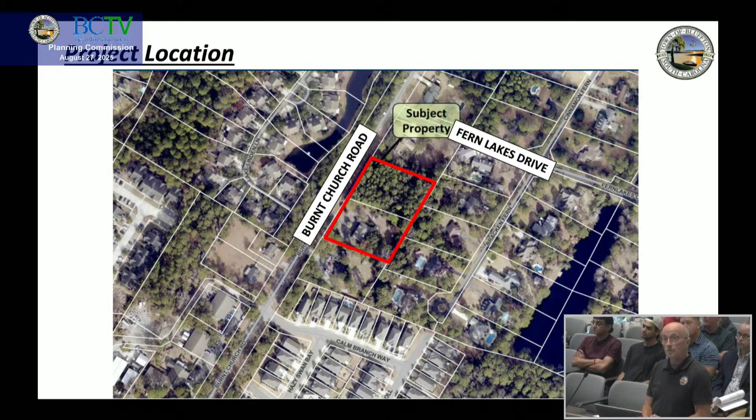Here's where the subject property is located. Here's an aerial of the property. We've got a red line wrapping around 2 parcels. Actually, it is the northernmost parcel and just a little bit of the northern portion of the southern parcel would be included in this property. I'll point that out when we get to the site plan.

As the chairman already mentioned, this is old business. On June 25th, 2025, the Planning Commission tabled this application. PC members asked that the applicant provide a traffic assessment, address public comment concerns that were expressed at the meeting by the adjacent property owners, and, at the discretion of the applicant, meet with 3 commission members to further refine the proposed development.

On July 15th of 2025, the applicant did meet with the 3 Planning Commission members and provided a resubmittal on July 30th. The resubmittal addresses neighborhood concerns and includes a traffic assessment.

The application for a preliminary development plan is located within the neighborhood core and is subject to the standards set forth in the UDO. The subject property is currently vacant and adjacent to Beaufort County jurisdiction. The applicant proposes a 4,464 square foot commercial building with associated driveways, access, parking, utilities, and stormwater infrastructure. The property is also within the Highway Corridor Overlay District and will require a certificate of appropriateness, Highway Corridor Overlay, that reviews landscaping, lighting, and architecture.

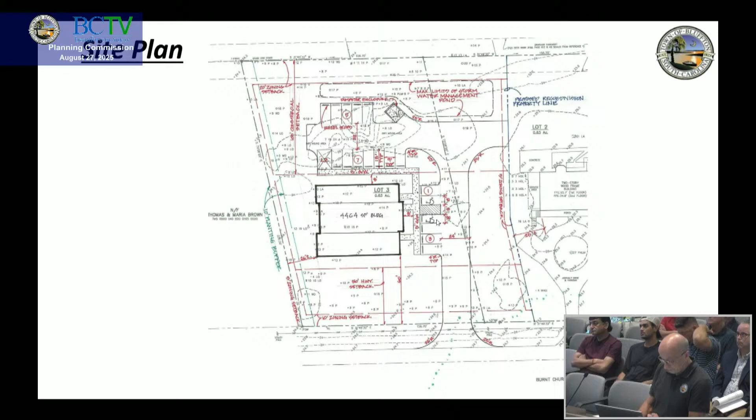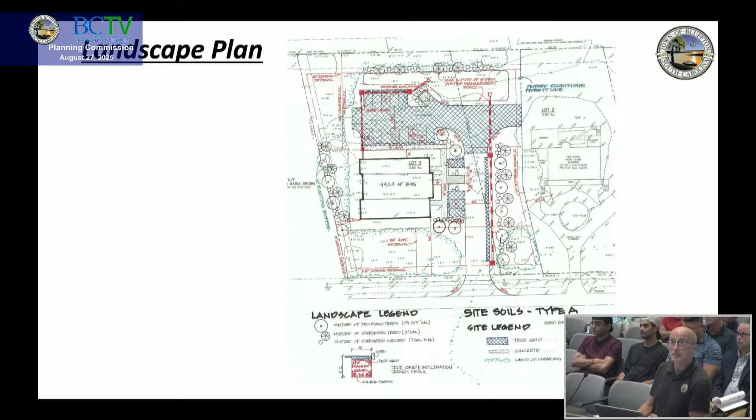The responsive criteria was included in your packet. Planning Commission has the authority to take the following action.

You can approve the application as submitted. You can approve the application with conditions. You can table the application, or you can deny the application as submitted by the applicant.

Town staff finds that the requirements of section 310.3A of the UDO are met and recommends that the Planning Commission approve the development plan application as submitted. The suggested motion is below. The applicant is here, and I can take any questions, or the applicant can answer any questions you may have.

Mr. Chairman, seeing as this is old business, I'd like to go ahead and start with the commissioners to see if there are any questions or comments on this, and then we can bring the applicant up if needed.

The only comment that I have concern about is the 19 and 12-inch live oak on the northern side of the building, and I ask that as the development plans progress, they really take note of those and try to do everything they can to preserve those, as well as the cluster of live oaks in the northwest corner in the front of the building.

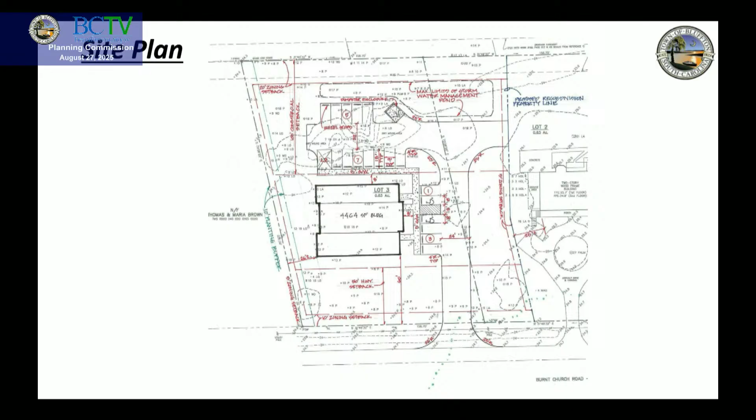There's a 30-foot drainage easement in the back. Is there already a ditch there that you're going to outfall to? No, but the topography lends itself to take it down the property line and then down the back of the existing subdivision.

Those details will be worked out with your stormwater management plan. I'm just curious. Thank you.

If there are no other comments, I'll entertain a motion. Dan, could you put the motion back up for us? I'll make a motion to approve the 121 Burnt Church Road preliminary development plan application as submitted. We have a motion and a second. Any discussion? All those in favor? Aye. Passes unanimously. Thank you.

Under new business, first item, the Goddard School Development Plan. A request by Kathleen Duncan of J.K. Tiller Associates on behalf of David Johnson of Speyside Partners LLC for approval of a preliminary development plan application. The project consists of the construction of a two-story daycare building with associated infrastructure. The property is zoned Buckwalter PUD and consists of approximately 1.6 acres identified by the tax map number in our agenda, within the Washington Square Master Plan.

Mr. Frazier: This is a preliminary development plan for the Goddard School, a request by Kathleen Duncan of J.K. Tiller Associates on behalf of the property owner, David Johnson of Speyside Partners LLC. The project consists of a two-story daycare building with associated infrastructure. The 1.6 acre property is zoned Buckwalter PUD, within the Buckwalter Commons Parcel C4 Master Plan. The property is subject to standards set forth in the Buckwalter PUD Concept Plan and Development Agreement, the Buckwalter Commons Parcel C4 Initial Master Plan, and UDO Sections 5.3 and 510.

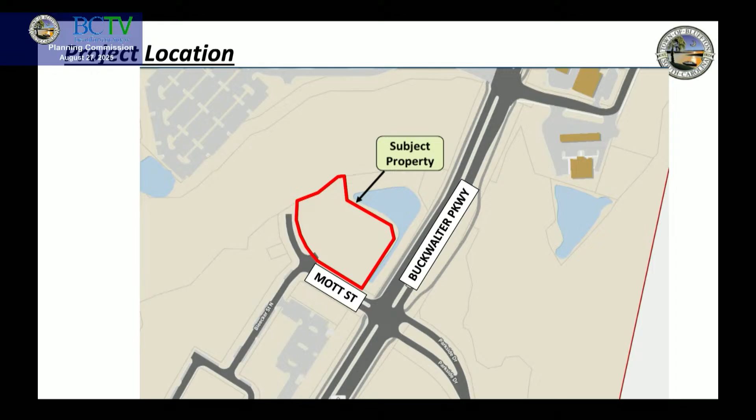As part of this plan, the developer constructed roads and infrastructure to support future development of individual parcels. The proposed development includes a 16,080 square foot, two-story daycare center, including 13 classrooms and one multi-purpose room, with associated driveways, access, parking, utilities, and stormwater infrastructure. The proposed facility is designed to accommodate approximately 220 students and 26 staff members.

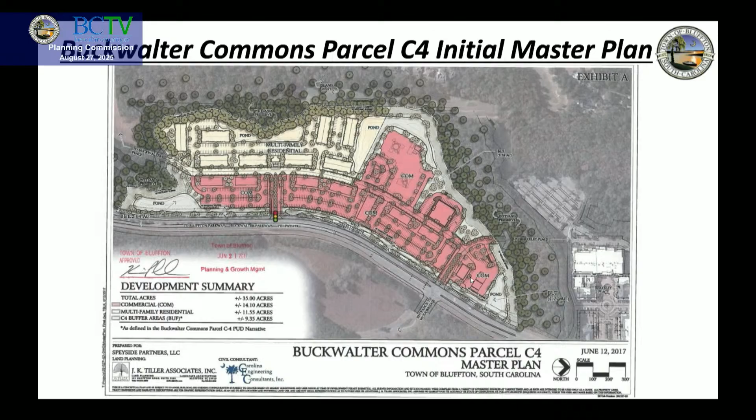Here is the C4 initial master plan I just referenced. This is the location we're talking about. In the master plan, it's called out as commercial development. The proposed development requires 28 on-site parking spaces.

The applicant proposes 45 parking spaces to accommodate staff and school drop-off and pickup during peak periods. The Goddard School follows an operational model implemented at other locations where parents are required to park their vehicles and walk their children into the facility, so there is no drop-off at the curb.

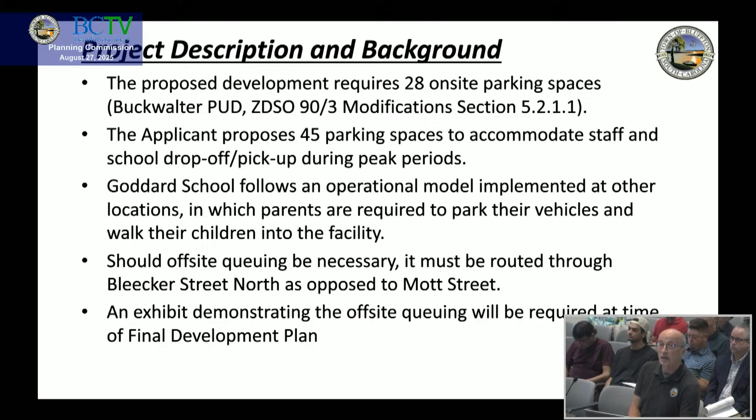Should off-site queuing be necessary, it must be routed through Bleecker Street North as opposed to Mott Street. An exhibit demonstrating the off-site queuing will be required at time of final development plan. Washington Square Review Board approval letter will be required prior to development plan approval. A traffic assessment submitted by the applicant concludes that the proposed daycare will generate comparable daily and peak hour trip volumes to the commercial use previously anticipated in the original traffic impact study for Washington Square. This parcel was contemplated as a gas station, which would have generated more trips than what's being proposed.

Staff comments on the preliminary development plan were reviewed at the July 9, 2025 DRC meeting. The applicant provided a response to comments and revised site plans on July 25.

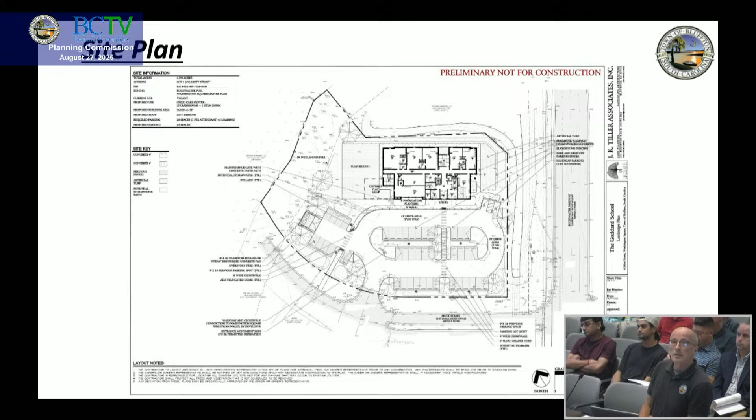Here's the site plan, and a closer view of it. The routing just opposite the entry onto the site is Bleecker Street North, accommodating two-way traffic going in, circling around, and coming out. The playground is on the west side of the building, and the east side has artificial turf. The entrance is up front, with walkways allowing parking and a minimal walk before reaching a crosswalk that guides you to the front door, with a sidewalk wrapping around the building.

They are not providing the 8-foot foundation plantings adjacent to the building because it's understood the playground and being able to look out the windows and see the playground and see the kids is an important part of this.

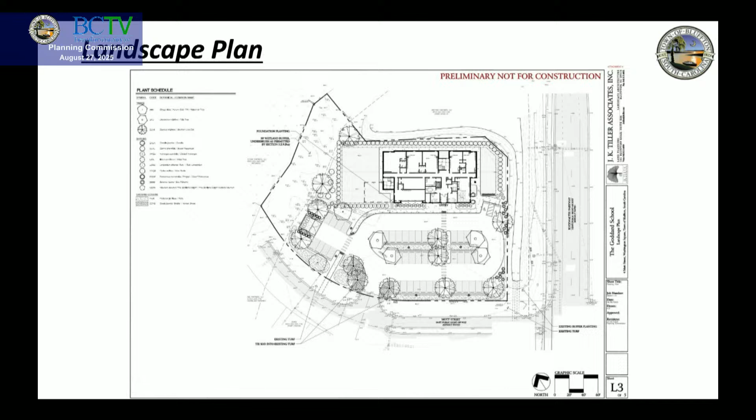The dumpster is at the end of the dead-end parking area. I can return to this if you have any questions. The landscape plan, I also have a close-up of it.

Here they're providing, in lieu of the 8-foot around the building, planting that wraps around the building, plus the enclosed areas for children's playground. I will return real quick to... I don't have... I guess I can use this one.

This is Bleecker Street North that we're referring to when we're talking about queuing. What we do not want is queuing onto Mott Street, which, if enough cars are there, would back up into Buckwalter Parkway. We could resolve this by making sure any off-site queuing while dropping kids off at peak hours is routed along Bleecker Street here rather than Mott Street.

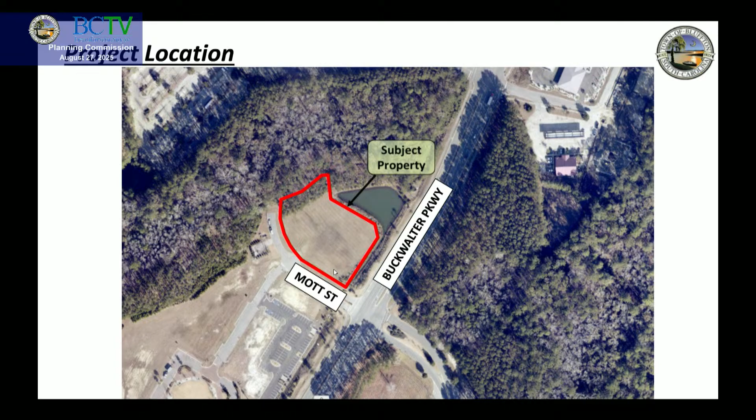Planning Commission shall consider the criteria set forth in section 310-3A of the UDO in assessing an application. These are the criteria; the responsive criteria were included in your packet. Planning Commission has the authority to approve as submitted, approve with conditions, table the application, or deny the application as submitted by the applicant. Town staff finds that the requirements of section 310-3A of the UDO are met and recommends that the planning commission approve the development plan as submitted.

Of the suggested motion there, I'll open it up for questions, and the applicant is here. Why don't we have the applicant speak if they'd like?

Feel different being on this? It does feel different. Good evening, commissioners. Thank you for having me. Thank you for being here and giving your time and attention to things that matter to Bluffton.

Again, I'm Kathleen Duncan. I'm a landscape architect and the project manager at J.K. Tiller, and here representing the Goddard School, and I'm happy to answer any questions you might have.

Okay, let's start at Commissioner Delacour, your end. Yeah, I'd like to know a little bit more about this: there's 220 students, 45 parking spaces, 26 for staff, so there's 19 for drop-off. I want to understand two things: how are the times staggered so that 19 parking spaces is enough, and how will we enforce people not queuing up on Buckwalter?

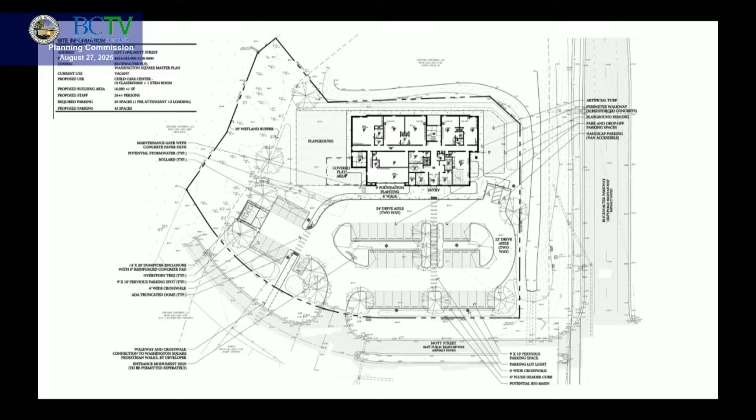I do have a question, Mr. Frazier. That north-south connector road, Mott Street, is supposed to at some time, by some magical way, connect to where the Cinemark is and the plaza. Do we have any indication if it's being funded, if anybody's funding it, or is it still just a ghost, at some point in time it's gonna connect? No, Mott Street going north. I don't think there's anything, I don't think there was discussion on that right now, but I wanted to ask just to see. Unfortunately, that takes two parties because it's not just the developer on this side, it's the property owner on the other side who has to meet that road and make that happen. Yeah, and that's a real good point, and that's why on the commission nowadays we require that they pave right to the property line, to avoid this very situation.

Do you want to take it back to the proposed motion page, sir? Thank you.

Entertain a motion? I'll move to approve the Goddard School Preliminary Development Plan application with the condition that the school coordinates with the Bluffton PD on the alternate queuing plans based on the need in their program. Do we have a second? Second. Any discussion? Want fire in there? I think the police can pull the fire in as part of it, so I think that's fine. All in favor? Aye. Aye. Aye. Okay, passes unanimously. Thank you.

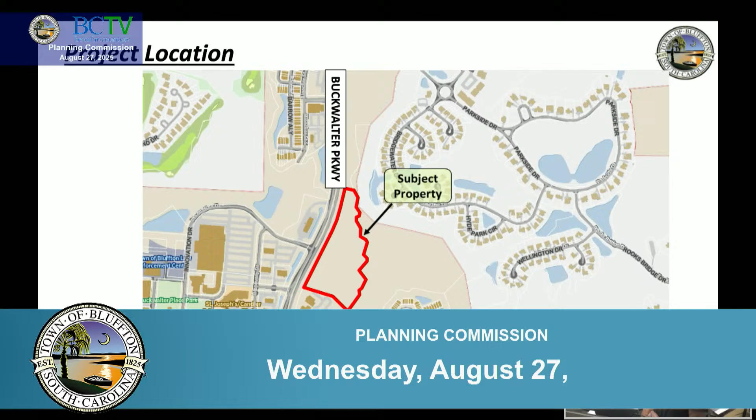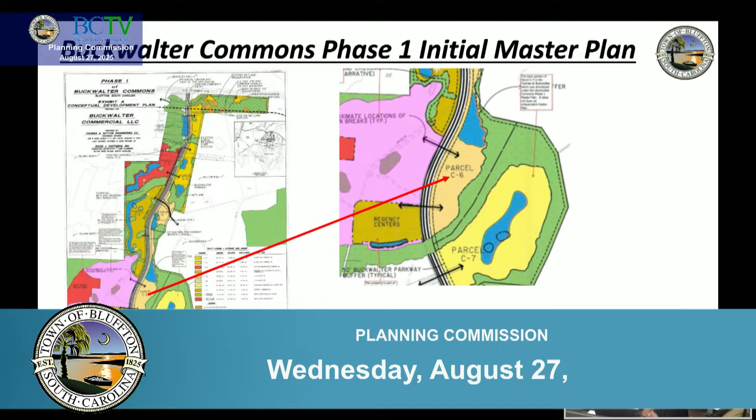Here's the location of the property. It is off Buckwalter Parkway, opposite of the Buckwalter Place development. The aerial is the same location. It is actually within parcel C6 of the Buckwalter Commons Master Plan.

On August 12th, 2025, Town Council approved a transfer of development rights of 60 residential units from the town's development rights bank. A 100% density bonus for affordable workforce housing was also approved, allowing for an additional 60 dwelling units for the property. The units will be available to Beaufort County Memorial Hospital employees, but also to any other person seeking affordable housing. The development includes 30 units restricted to 40% area median income, 60 units restricted to 60% AMI, and 30 units restricted to 80% AMI.

The proposed development includes 5 multifamily buildings totaling 120 units, 1 leasing office building, amenities, and associated infrastructure. It'll also include a building pad for a future 6,000 square foot medical office building.

The site is primarily accessed from Buckwalter Parkway. However, a second access will be utilizing a shared access easement with Lord of Life Church to the south. This will circle around and exit out onto Buckwalter Parkway at the signalized intersection opposite Buckwalter Place Boulevard.

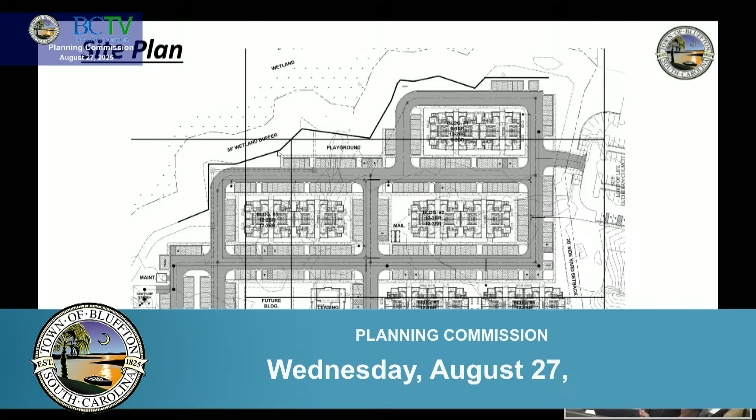We see opportunities for some additional parking in multiple locations. The property line is actually the wetland determination line, and they have to come 50 feet off of that with a wetland buffer. That 50 foot takes them to this line here. The heavier line is actually a retaining wall that is part of the design of the site plan.

Planning Commission shall consider the criteria set forth in section 310.3A of the UDO in assessing an application for a preliminary development plan. These are the criteria. Responses were included in the packet.

Planning Commission can take the following action: you can approve it as submitted, you can approve the application with conditions, you can table the application, or you can deny the application as submitted by the applicant. Should the Planning Commission choose to approve the application with conditions, town staff finds that the following conditions should be met prior to final development plan approval to be in conformance with UDO section 310.3A: the applicant will coordinate with town staff to meet the parking requirements that are per Buckwalter PUD ZDSO 90/3 modifications, section 5211. I have a suggested motion.

I'll open it up for questions. The applicant is here. Mr. Chairman.

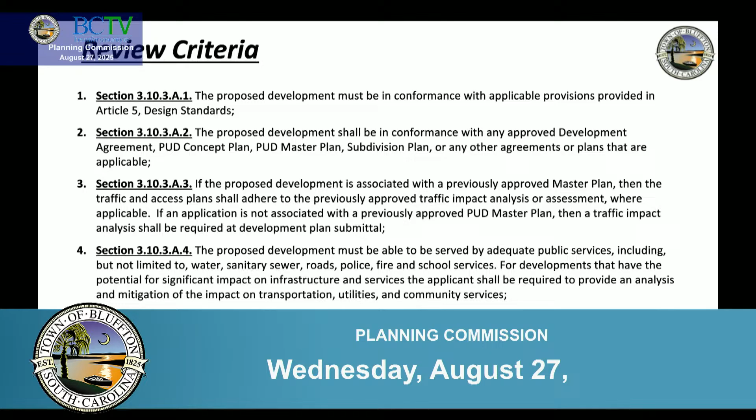If the applicant would like to speak to the project. My name's Tim Butcher with Carolina Engineering, representing the Livewell Terrace project. Dan did a great job presenting the project, and pretty much just here to answer any questions you guys have. Got the ownership and developer and their counsel here, so I'm just here for anything that you guys need.

Well, let me ask you, based on the public comment we had earlier, as far as wetlands on the property, Army Corps of Engineer delineation, any comments on that? Any data to back that up? Back, I want to say 2003, when the PUD was done, there was a delineation then, and we just had another, and that was verified as well by the Corps. In 2022, we had another delineation that was verified by the Corps as well, so now we have a current delineation for the site. And I know I've walked that property, it's been about 6 months, but it was, for what it's worth, dry back then. We've had some extreme rain in the last month here. I'm thinking that's probably played into it somewhat.

We can't, Richardson, help me out here. Can we overrule the Army Corps of Engineer and say there are wetlands where they say there aren't? Under our wetland ordinance, so this was a 2022 one, it's good for 5 years. The wetland ordinance the town just adopted creates kind of a distinction point from September 2023 and prior. That was prior to the decision that the EPA, or the Corps, would no longer be focused on jurisdictional and non-jurisdictional; it would only look at jurisdictional. So the way the ordinance as drafted and approved by town council is written, delineations that were issued prior to 2023 and that are still in effect and the terms are being complied with, those are binding on the town as to the location and determination of where the wetlands are located. So, long answer, no.

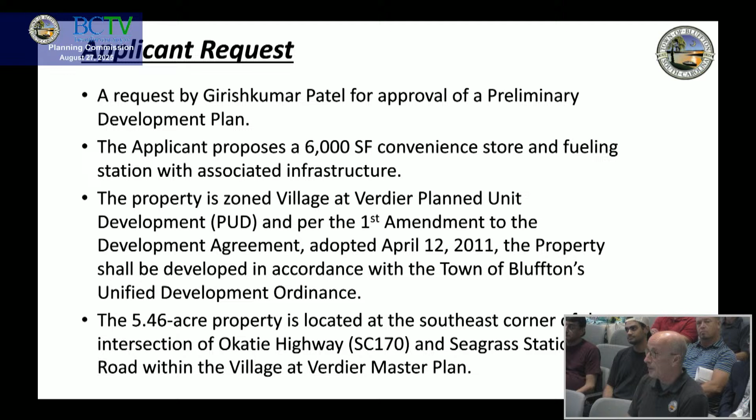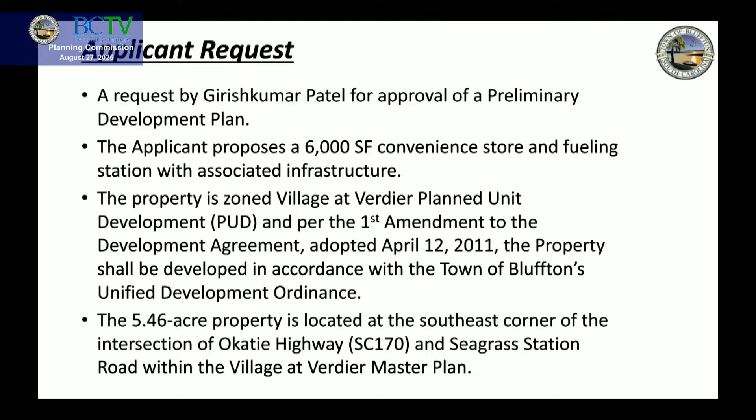Mr. Frazier: Thank you, Mr. Chairman. This is a preliminary development plan for Seagrass Station's convenience store, a request by Girishkumar Patel for approval. The application proposes a 6,000 square foot convenience store and fueling station with associated infrastructure. The property is zoned Village at Verdier PUD, and per the First Amendment to the development agreement adopted on April 12, 2011, the property shall be developed in accordance with the Town of Bluffton's Unified Development Ordinance. The 5.46 acre property is located at the southeast corner of the intersection of Okatie Highway and Seagrass Station Road within the Village at Verdier master plan. Here's the location of the property.

There's an aerial of the same location.

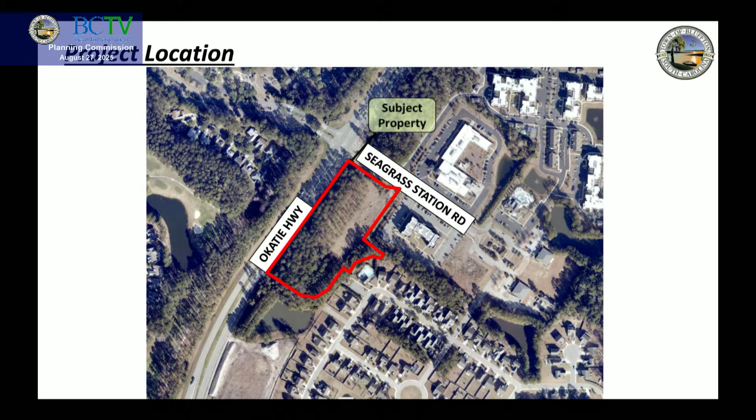The applicant proposes the construction of a 6,000 square foot convenience store and fueling station with associated driveways, access, parking, utilities, and stormwater infrastructure. The site will be accessed from Okatie Highway and Seagrass Station Road, and an internal connection to Amanda Road as well. Per the approved master plan, the applicant proposes a connector road between SC 170 Okatie Highway and Seagrass Station Road. A Village at Verdier master property owners association application approval letter will be required prior to development plan approval, and an SCDOT encroachment permit will be required for offsite improvements.

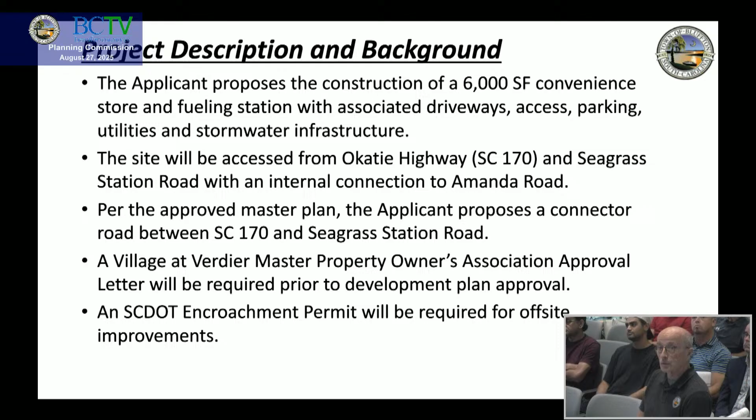The connection we are talking about, Amanda Road, I'll show you on the site plan, but on the master plan it shows a connection out to Okatie Highway. It varies a little bit with the site plan, it's still a connection, but it actually ties in to the required road that curves in from Seagrass Station Road into Okatie Highway. It's going to be clearer here in a second.

A total of 24 on-site parking spaces are required and 36 have been provided. A landscape island will be required after every 8 continuous parking spaces. I think they have 1 or 2 locations where they're going to have to put in a landscape island. The parking and/or service areas shall be separated from adjoining residential properties by a planting screen, fence, or wall at least 6 feet in height.

That is per UDO section 4.4.2B2. The applicant proposes 10 fueling pumps, however no more than 8 pumps are permitted per UDO section 4.4.2B4. To ensure adequate gasoline and delivery truck routing, the applicant must provide a truck circulation exhibit at time of final development plan submittal.

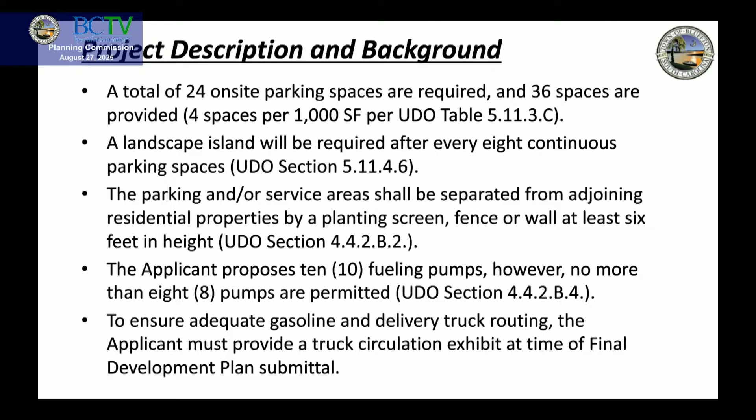Here is the site plan. This shows that this property here is also owned by the applicant. Here's the parcel, that's the subject parcel, with off-site detention provided here.

This is Seagrass Station coming off of Okatie Highway. So Seagrass Station Road has an apron right now. This would be the road that's being built in conjunction with this development plan, coming back out to Okatie Highway. This is an extension of the internal residential road that would tie in and be controlled with a stop sign.

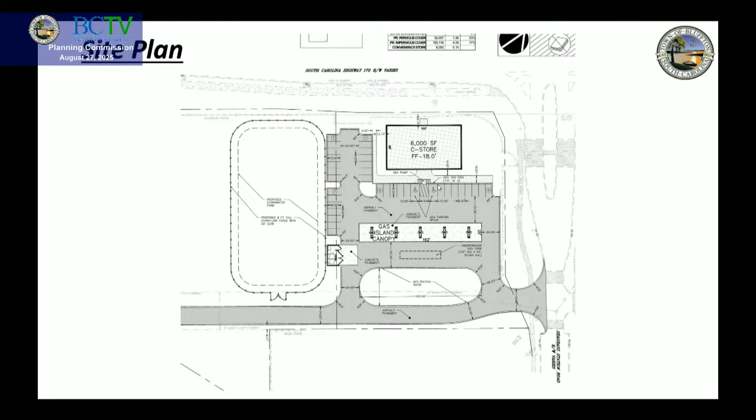Here's a closer view. We've got 10 pumps here, there needs to be 8. The anticipated route for any fueling and large truck deliveries would be entering off of Seagrass Station or the reverse, and coming through here. Here's the underground tanks, and coming back out headed back out to Okatie Highway. Here's the location where they're going to have to add at least one landscape island.

We can handle that at time of final development plan. They don't even need to provide a landscape plan at this point in the process, but this gives us the opportunity to review it and give them some comments ahead of time.

The applicant has provided a traffic impact analysis technical memo dated January 10, 2022, which includes the proposed land use as defined in the Village at Verdier PUD. The summary of the TIA states that the Town of Bluffton recently conducted a signal warrant analysis at the intersection of Okatie Highway at Seagrass Station, and it was not warranted per a discussion with DOT.

Staff will require an updated TIA and/or a signal warrant analysis to verify the validity of the submitted findings. I believe they submitted this also to Josh Johnson with SCDOT, District 6. The TIA they've submitted with this application, he provided some preliminary feedback. I'll let the applicant elaborate on that.

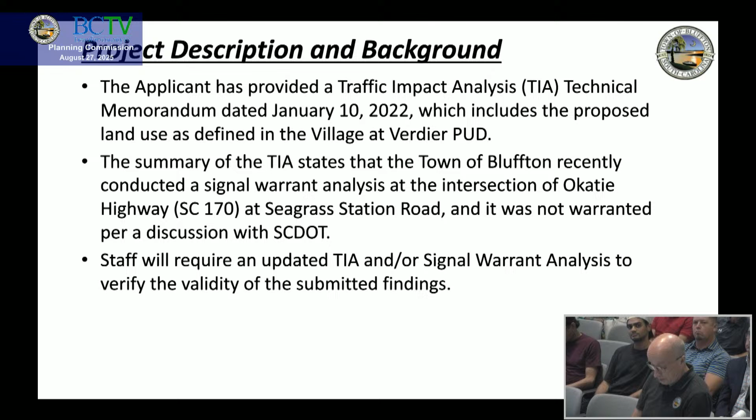Staff comments on the preliminary development plan were reviewed at the July 23, 2025 DRC meeting. Five residents of the Seagrass Station community spoke in opposition to the proposed development. The applicant provided a response to comments and revised site plans on July 30th, 2025.

Subject parcel is within the Highway Corridor Overlay District and will require a certificate of appropriateness, reviewing landscaping, lighting, and architecture at time of final development plan approval. Planning Commission shall consider the criteria set forth in Section 3.10.3.A of the UDO in assessing the application.

Here are the criteria. The responses are in the packet. Planning Commission has the authority to take the following action: you can approve as submitted, approve with conditions, table the application, or deny the application as submitted by the applicant.

Staff recommendation: should Planning Commission choose to approve the application with conditions, town staff finds the following conditions should be met prior to final development plan approval to be in conformance with UDO Section 3.10.3.A. One, provide an updated landscape plan demonstrating the planting screen, fence, or wall at least 6 feet in height along the parking and or service areas adjacent to residential properties at time of final development plan review.

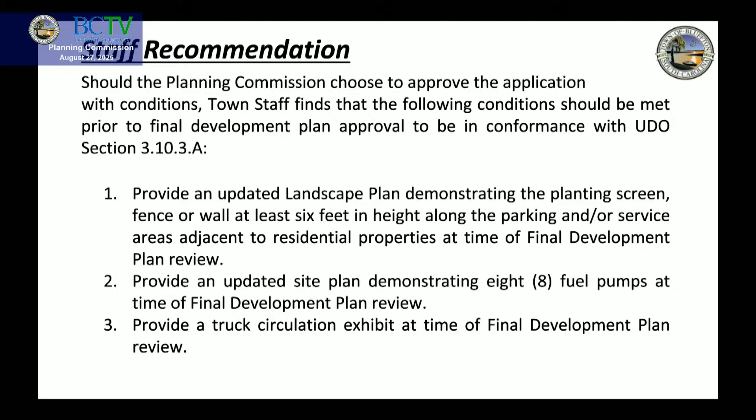We would include that it would also be adjacent to the amenity as well as the single-family residential lots. Two, provide an updated site plan demonstrating 8 fuel pumps at time of final development plan review—they're currently proposing 10. Three, provide a truck circulation exhibit at time of final development plan review.

So there's a suggested motion. I can open it up for questions. The applicant is here. Let's go ahead and let the applicant speak, and then we'll open it for questions and comments.

I actually have some questions too. But before I get to that, this is one thing that might ease some concerns based on some of the public comment: we placed this convenience store and gas station at the very northwest corner of the site. So we're approximately—I heard we're 20 feet away from residential, but as the crow flies, we're probably 400 to 500 feet away from those residential properties.

We're actually adjacent to the extended stay hotel, which is to the east of our site, at the bottom of the plan here. And I don't believe that requirement for the buffer or those additional plantings extend along this portion of the property line, but we're happy to provide additional plantings here and along this property line to meet those standards.

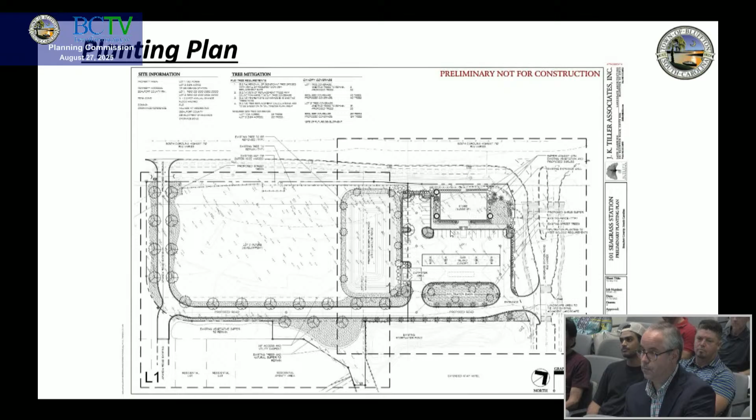As far as the HOA's request for ARB approval, we will be back before you for highway corridor review, which you'll get to see and review the architecture. Those plans are currently in the works, and we will be in communication with the HOA and working with them on HOA approval for the architecture as well.

We've also got Mr. Moore here, who's our civil engineer, so if you have any questions for him, I'd be happy to answer. Thank you.

I had one question pertaining to one of the comments about the current condition of the entrance at the main entrance—I think it's brick pavers. It's in pretty bad shape, and obviously the weight of the trucks is going to really put a toll on those, even worse. Have you guys thought about how to address that?

I know we'll have to tie into that road. There is an existing stub out, and I'm not sure exactly where that line starts or begins, but I'm sure we'll have to meet or exceed it.

Hey, I'm Robert Moore, civil engineer. As the plan shows, we will also have this additional connection here to the SCDOT right-of-way, which is somewhat of an extension of Amanda Road, which will relieve some of those concerns of trucks coming through that entrance to the Seagrass Station.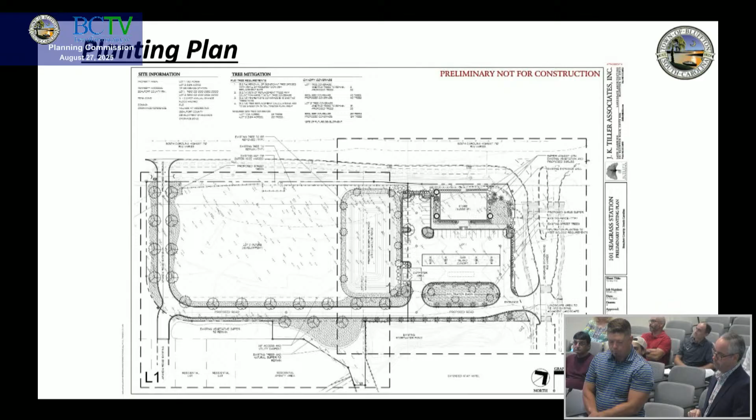I have a couple questions. Just regarding the proposed—I guess it would be up off of Amanda—is that correct? Yep. Do you have approval from the state to be able to put that in?

So we're in the process of working with the state to get the permit. We have to get a full South Carolina DOT permit for that driveway connection, so we've got to submit a traffic study to them.

They gave us two options: we either could get a letter sign-off from y'all that we don't need that based on the information we've already submitted, or we could submit new information to them to let them know if there's a signal needed at the Seagrass Station intersection. That was my second question.

Right, or a decel lane needed for our connection where we're proposing it. So we've got a little bit of a road left to go with South Carolina DOT, but that permitting would come after this step of the process for us.

And again, listening to the public and their feelings of this project as well—my concern would probably be on your part, if you're not getting that letter from the master POA. Something I would think you might run into an issue with as well. Yeah, we've got some steps left, yes, for sure.

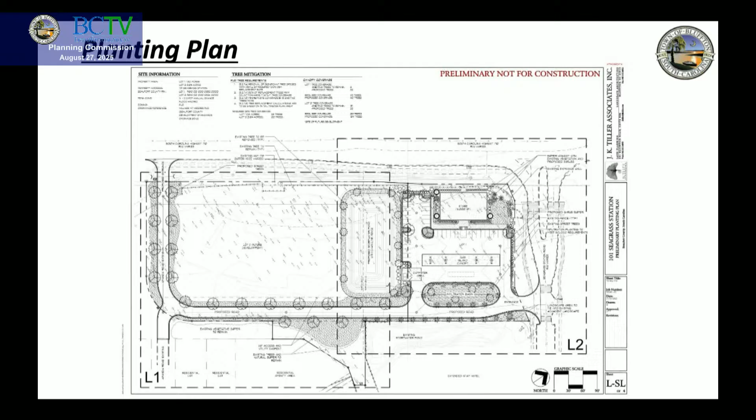And then the next question is, this is for either Dan or Richardson. I know the master plan shows a full extension of Amanda Road out to Highway 170. That's correct, but that was for a different use—for a mixed-use development versus a strictly commercial use. Is there any way you would allow the applicant to only build the road to access 170, but not provide access into the residential portion of the property?

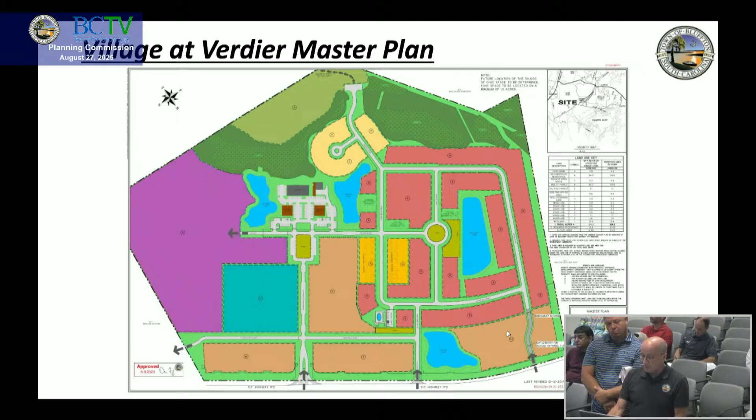A secondary access right there into the residential portion of the property of Seagrass? Well, two things. One, it would require an amendment to the master plan. Second, the most recent amendment to the master plan actually did something very similar—it took this connection out with the neighborhood. It would have to be a similar amendment, but I think at town council they made it pretty clear they did not want to see this coming back to them, asking for that second access point to be removed.

I think the solution there is to have a gated exit that the residents could control, so that people from 170 wouldn't go in. But I think that's a conversation that can happen. I know at the time this amendment took place, the residents in the back said they didn't necessarily want that connection ever being built anyway.

Was the intent of that secondary access for EVA access only? I don't think so—I mean, it was just to provide more opportunities so that everybody's not channeling out on Seagrass Road, but I'm not positive. One of the things council has made very clear is they want to see neighborhoods have at least 2 entrances, for emergency access. That's why I'm asking—if it's just emergency access, then you could gate it, put a Knox box on it, and the fire department could still access.

Yeah. All these questions.

So part of this—and this is based off of prior work with council, a little bit speculative—council's been very clear about their desire for interconnectivity within communities and between communities. There's been a concerted effort to ensure interconnectivity between uses remains as open as possible. I'd be hesitant about imposing a gating condition on that, because it would require approval of town council as well as a third party, the private property owners association. We don't want to delegate that authority. But if that's something they wish to explore independently, that can be raised and discussed with council and staff, and it may require amendments to the master plan.

But I agree with Mr. Frazier that the use indicated down in the bottom right corner—that portion of the master plan where the road was removed—I think it was the type of use that made sense to have removed, and not have that interconnectivity, because that was, I believe, car storage.

But if I may, Mr. Chairman—I'm trying not to speak anymore at this meeting if possible—but just for the people here from the public, let me give them an idea of what stage in the process we're in right now. This is a preliminary development plan, for the Planning Commission to review to make sure it meets certain requirements under our town code. That way the owners of the property and the developers can move forward with more complex or sophisticated plans, knowing before developing everything from architecture to stormwater to the full kit and caboodle, that it meets the baseline of town code. You never know how much experience people have with the Planning Commission here.

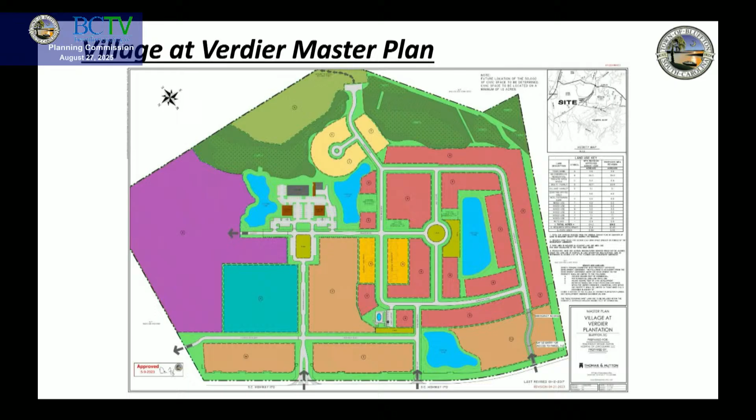But the one that's even more concerning to me is that intersection. That intersection, at some point in time—and I think this is probably the point—is going to need a traffic light. It's going to warrant a traffic light. I think we should seriously consider making it a condition of this approval, if it is an approval, that we not only require a signal warrant analysis after the project is done during the school year, but that money for a traffic light is bonded in case it's required.

Richardson is thinking through whether we can require this. My concern is we get to the end of this project, the convenience store is built, and it's a function of life, but the last one to build before a traffic light is required is the one who has to pay for it. If this convenience store is what requires the light, and they do the warrant analysis and it says yes, a light's required, and the money isn't there, I feel we have been remiss in making sure that happens.

Our correspondence with Josh Johnson at the South Carolina DOT office, one of his comments is that he will require us to get written commitment from you guys that we don't need the traffic signal. A standard TIA is needed for the site proposed to include a signal warrant projection. Note that if a signal is projected to be warranted, the local government will still need to provide documentation relating to the commitment for the future traffic signal installation at the developer or local government expense.

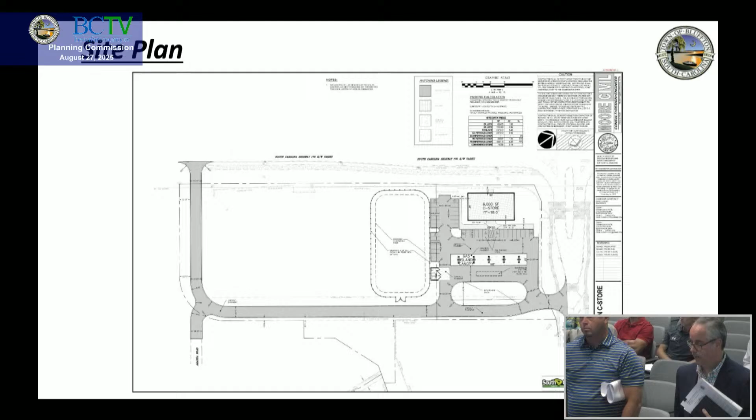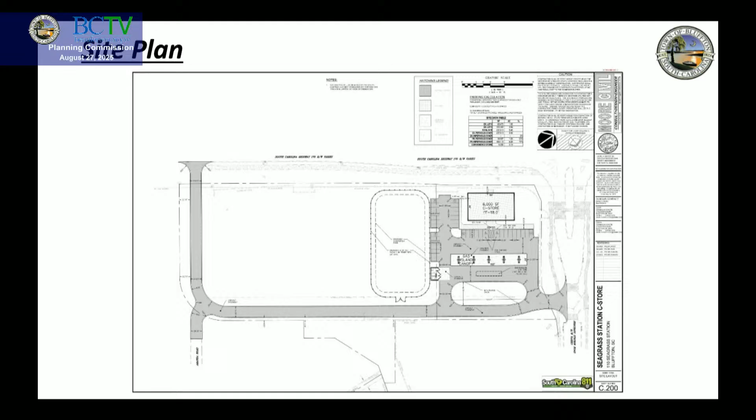One thing to note, even with that fence, there is 50 feet of existing vegetation buffer before you get to the residential lot, so there's ample opportunities for noise abatement. We've told other people this from up here, but it's be good neighbors. That's correct. And we heard from the neighbors at our DRC meeting, and we did address a lot of those issues from a landscape standpoint and a site plan standpoint after that meeting.

Any other questions or comments, folks? Just a quick review of things we are looking to make sure we have in this approval: the three conditions that the staff have, with the screening fence, the updated site plan with only 8 fuel pumps, the truck circulation exhibit, and I truly would like us to consider the signal warrant and the bonding for the light.

Mr. Chairman, instead of using the term bonding, just because it's got a limited scope, a financial commitment and surety from the developer if a traffic signal is warranted, a surety that it will be paid for by the developer. We have three or four different development sureties within the UDO, for installation and maintenance. You can do letters of credit, bonds, there's all sorts of ways to do it. So I just want to have that flexibility for them as well.

Sounds like if somebody's about to do a motion, it might be Will. That sounds about right. Yes, sir. Are you ready for a motion?

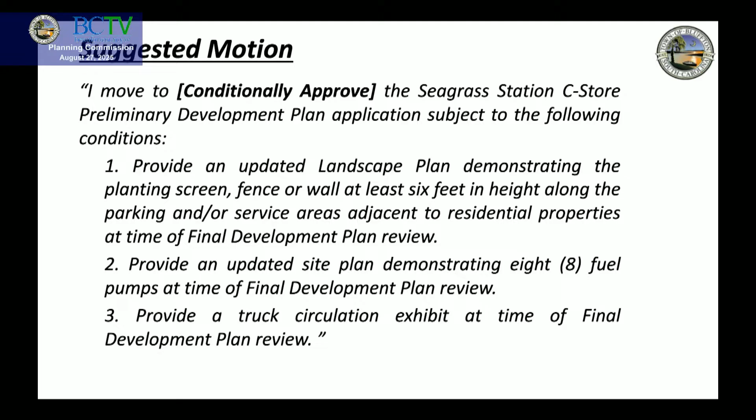I will move to conditionally approve the Seagrass Station Convenience Store preliminary development plan, subject to the following conditions. One, provide an updated landscape plan demonstrating the planting screen, fence or wall at least 6 feet in height along the parking and/or service areas adjacent to residential properties at time of final development plan review. Two, provide an updated site plan demonstrating 8 fuel pumps at the time of the final development plan, as opposed to the 10 shown on the site plan submitted. Three, provide a truck circulation exhibit at time of final development plan review to address movement of fuel trucks. And four, provide an updated TIA and signal warrant analysis, as well as a financial commitment to the installation and maintenance of a traffic signal if it is so warranted.

The warrant analysis will be after. They won't accept the warrant analysis. Will they accept a projection? I don't think so.

Okay, that's good. Do we have a second? Second. Okay, any discussion?

I just want to say, work with the neighbors. And I would second that. Please engage with the neighbors.

Okay, all in favor? Aye. Opposed? Motion passes. Thank you.

Final item tonight, agenda item number 4 under new business: 1271 May River Road Development Plan. A request by Kathleen Duncan of J.K. Tiller Associates, Inc., on behalf of property owner Sharon Piari Patel for approval of a preliminary development plan application. This project consists of construction of a 5,259 square foot mixed-use building and a 1,200 square foot carriage house with associated infrastructure. The property is zoned Neighborhood General Historic District, consists of 0.34 acres, and is identified by tax map number in the agenda within the Old Town Bluffton Historic District.

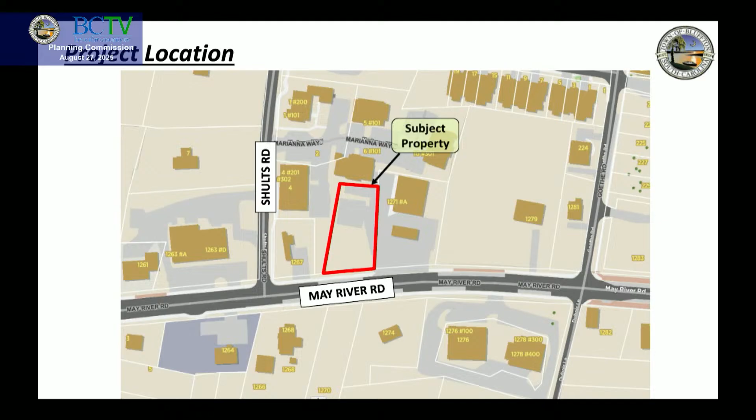The subject property is zoned Neighborhood General Historic District. As such, it is subject to the standards set forth in the Unified Development Ordinance. It is a 0.34 acre property located on the north side of May River Road, west of Goethe Road, within the Old Town Bluffton Historic District. Here is the location of the property, just east of the Shults Road, May River Road intersection. Here's an aerial of the same location.

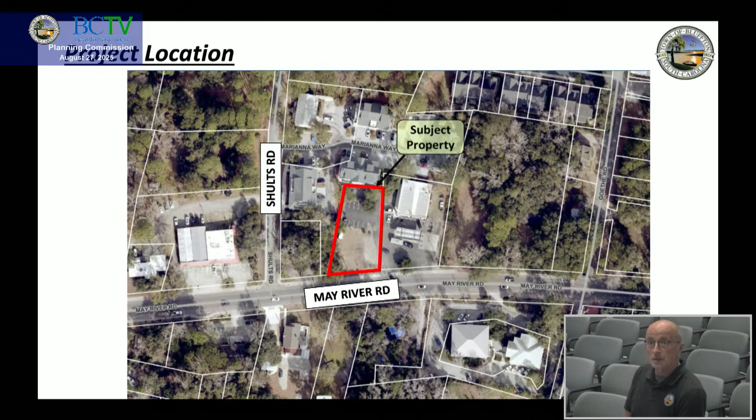The applicant proposes the construction of a 5,259 square foot, 2.5 story mixed-use professional building designed with potential for office, retail, personal service establishment, professional office, or medical office use, with 2 residential units on the 2nd story and on the half story above. In addition, a 1,200 square foot, 2-story mixed-use carriage house is proposed, which will include professional services on the ground floor and an accessory dwelling unit on the 2nd floor.

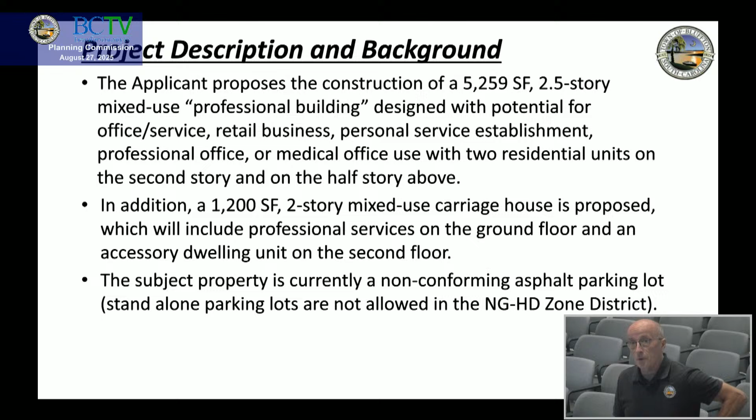The subject property currently has a non-conforming asphalt parking lot, non-conforming because it is a standalone parking lot, which is not allowed in the NGHD zone district. I have an existing conditions slide that will show what I'm referring to. The site plan requires 15 parking spaces, tallied as 9 residential spaces and 6 commercial spaces.

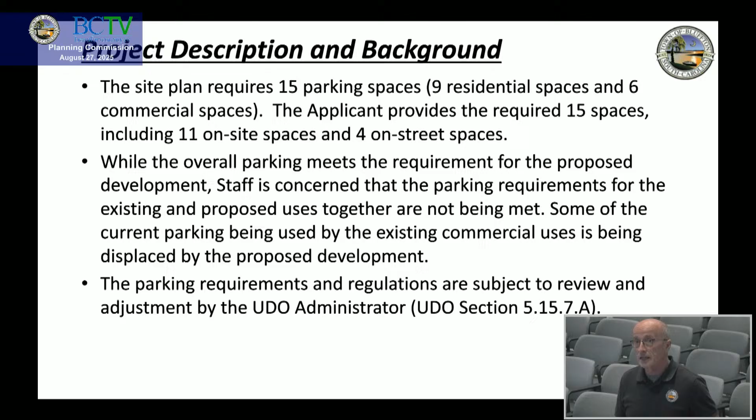The applicant is providing 15 spaces: 11 on site and 4 on street in front of the property. While the overall parking meets the requirements for the proposed development, staff is concerned that the parking requirements for the existing and the proposed uses together are not being met. Some of the current parking being used by the existing commercial uses is being displaced by the proposed development. The parking requirements and regulations are subject to review and adjustment by the UDO administrator, per UDO section 5.15.7.A.

So our concern is these spaces go away, and the spaces that are going to be brought back in with the proposed development are only meant to meet the requirements of the buildings that are being proposed. So we think there's going to be a deficit of parking spaces, and there's going to be issues with customers—folks that want to utilize this commercial retail establishment—using the parking spaces that are set up for the two proposed buildings.

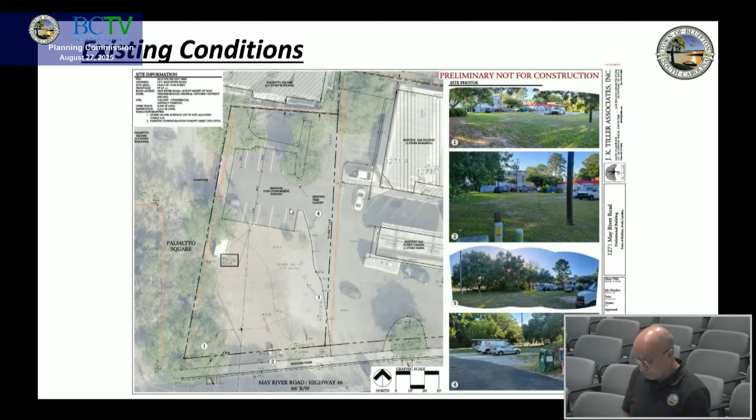There's an existing tree to remain here. That's a live oak, as well as here.

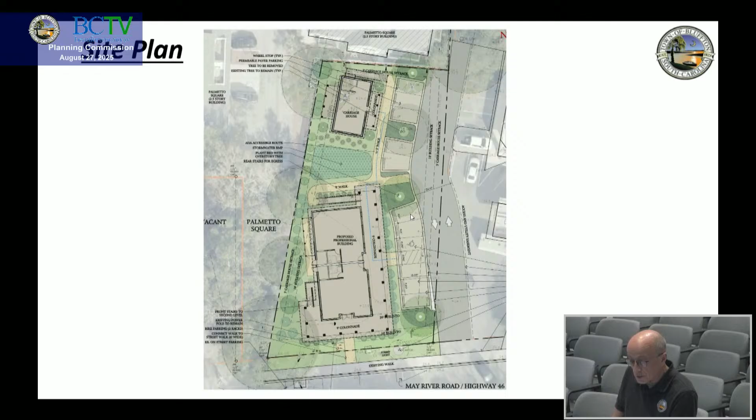The site includes a magnolia that is 6 inches DBH and 2 live oaks at 10 and 14 inches. The applicant proposes the removal of the magnolia and 1 10-inch live oak, replanting with a southern live oak and a Dahoon holly.

As proposed, the site plan meets the tree canopy and open space requirements. However, the proposed landscape plan does not meet UDO section 5.15.7.D.2, requiring a visual buffer between the public right-of-way and off-street parking area to be a minimum of 42 inches in height and 50% opacity.

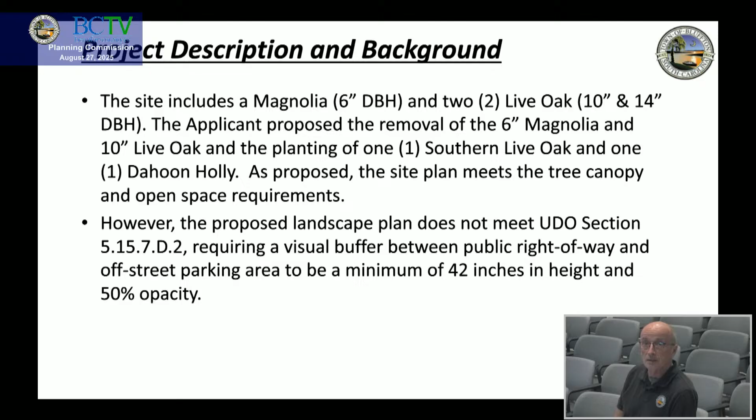I have a graphic that shows that. It's an easy fix. This is the landscape plan. We're looking at this corner here, and one gum tree is proposed.

However, some plantings that will mature to 42 inches or above being provided across here would make it so that when you're on May River Road, you have a screening buffer between you and the parking lot. So it's a simple fix, but it needs to be incorporated into their landscape plan.

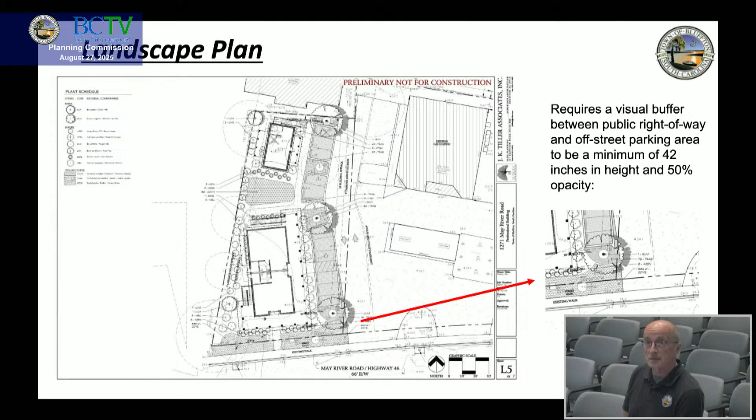The applicant provided a traffic assessment that proposes shared overflow parking with the adjacent Bluffton Market property. Should a shared access agreement be required, an easement in conformance with UDO section 515-7G shall be recorded with Beaufort County Register of Deeds.

Staff comments on the preliminary development plan were reviewed at the July 23, 2025 DRC meeting. The applicant provided a resubmittal, including a response to comments on July 30, 2025. That was in your packet.

Subject property is within the Old Town Historic District and will require a certificate of appropriateness, with historic district review covering landscaping, lighting, and architecture at time of final development plan approval.

Planning Commission shall consider the criteria set forth in section 310-3A of the UDO in assessing the application. Here are the criteria. Responses to them are included in the packet, in the staff report.

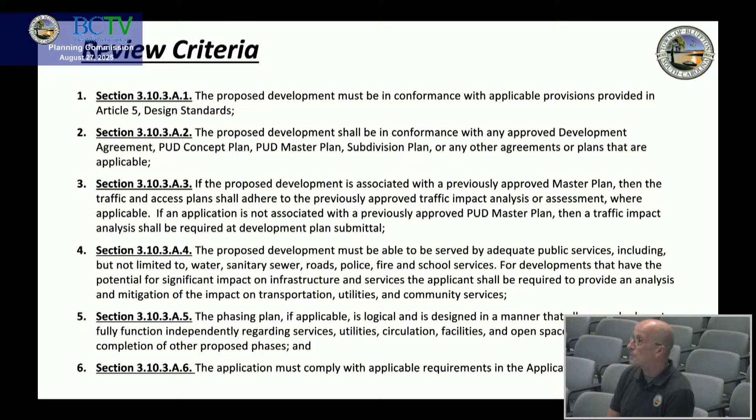Planning Commission has the authority to take the following action: you can approve the application as submitted, approve the application with conditions, table the application, or deny the application as submitted by the applicant.

Should the Planning Commission choose to approve the application with conditions, town staff finds the following conditions should be met prior to final development plan approval to be in conformance with UDO section 310-3A. First, the UDO administrator will review and adjust the parking requirements and regulations for the subject and adjacent properties as needed to address staff's concerns.

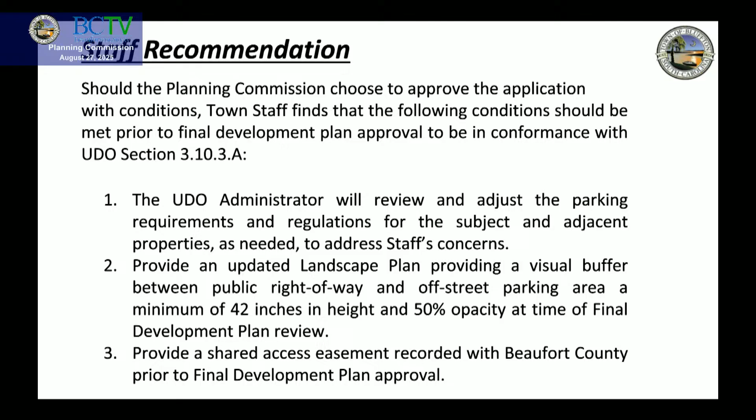Second, provide an updated landscape plan providing a visual buffer between public right-of-way and off-street parking area, a minimum of 42 inches in height and 50% opacity, at the time of final development plan review. That's an easy fix. Third, provide a shared access easement recorded with Beaufort County prior to final development plan approval. Here is the suggested motion we can go back to.

I'll open it up for questions, and the applicant is here. Does the applicant want to speak first? And what is it with you and parking space issues today? Yeah, today. Is it me or?

Hi again, Kathleen Duncan, J.K. Tiller Associates. I am happy to answer any questions. I'm happy to go into the parking if you want me to start there, but I kind of wanted to open the floor and let you guys give me a little more feedback before I dove into anything. Well, let's take it and see where it goes with the commission. Okay, your turn.

My only concern, other than the parking, is that at DRC, one of the comments was it really proposes too much development on too few of a land area. My impression was that was received and moved on. So I'm curious whether or not that comment from the DRC resonated with the applicant at all.

I would say that, of course, comments that are brought at DRC are of great consideration as we're reviewing this. Did anything change? Here's what changed: I would say our communication about the site and clarifying a few items. I think that is more how we address that, rather than reducing anything on the property. I think that's to answer your question.

And that's where I'm struggling with this, and it becomes, how big are these buildings? These are three-story buildings going on here. If it was narrower, oriented a little different—I know we're supposed to orient it to May River Road, but there are exceptions—can some space be grabbed back? That's a huge porch on those buildings. How big is that porch?

9 feet? Christopher Epson, Circle Architecture, I'm the architect. That porch is 8 feet. As per the UDO, we have 8 feet of the inside column. We have been to our conceptual meeting, Dan and the chair of HPC and the whole board have seen the buildings, and the buildings are within contextual. They approved everything except I just need to move my column spacing.

So it's actually 2.5 stories, not 3 stories, because the half story is within the roof. Yeah, but it's a half story on the outside, but a full story on the inside. I know what you're saying, yeah.

And what we're doing with those is utilizing the outside as our ADA accessibility and our egress instead of using interior space, which is part of CPTED, if you're familiar with CPTED—crime prevention through environmental design. It's using natural elements to reduce the way crime can be prevented, blind spots, like some of the buildings behind it—not my building, the other ones. It's to make it not hide, so we put everything on the outside so you can see where it's coming from, and it makes it more part of the community.

So to your first point of how can you hold one property up based off of the usage of another property, this is a perfect example of it. If they were to put a fence up, that would impact the adjacent property, and that's not even a development. And that would bring it into greater conformance because it would cut it off as a non-conforming use. All that to say, I think that from an ideal standpoint, this is very in keeping with the UDO.

To your second point, Charlie, the shared driveway - the UDO actually has a clause, it's in the narrative, I don't remember off the top of my head, but they actually ask for, if you are able to share a driveway, they prefer you to share a driveway access. So this is actually in conformance with the UDO from that standpoint as well.

And the fact that it is providing parking for the Texaco site, I think is a great asset to this area. Additionally, I drive by this site every day - we've had this project on the books for months, if not almost a year, which means I look at this at peak PM hours every day. One of the things I've noticed is that people are actually, because of the ease of it, choosing to park on the vacant lot rather than parking on the Texaco site. So I think you would actually see a shift in where they're parking, not a shift to where we're not going to be able to park them.

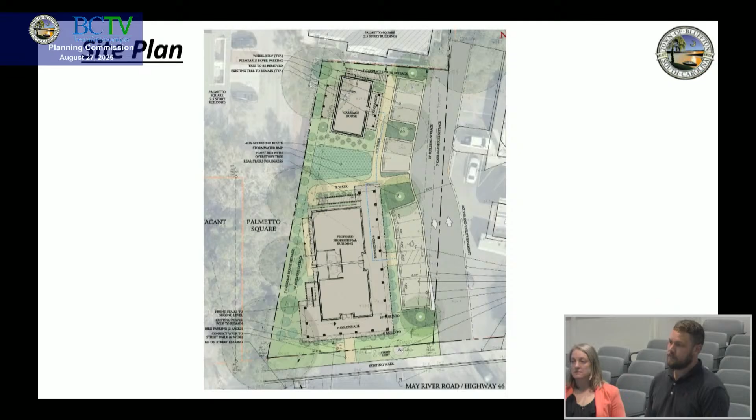The fire marshal has a review on DRC, right Dan? Yeah. So you're using the fuel pump bays as your hammerhead, basically? Yeah, it's running right up there, as long as the fire marshal's okay with it. It becomes okay until and if the gas station's redeveloped - which would be weird not seeing Mr. Patel at the gas station, but that's how it is.

Any other questions, comments? To entertain a motion? Dan, has the staff suggested conditions if you do a motion to approve?

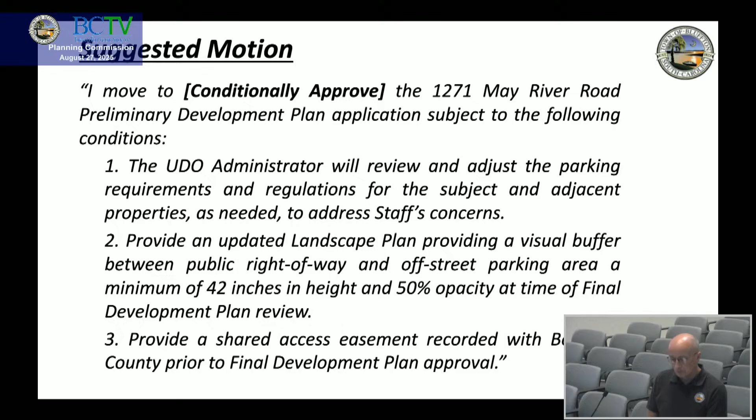I'll make a motion. I move to conditionally approve the 1271 May River Road preliminary development plan application subject to the following conditions. Number one, the UDO administrator will review and adjust the parking requirements and regulations for the subject and adjacent properties as needed to address staff's concerns. Number two, provide an updated landscape plan providing a visual buffer between public right-of-way and off-street parking area, a minimum of 42 inches in height and 50% opacity at the time of final development plan review. And number three, provide a shared access easement recorded with Beaufort County prior to final development plan approval.

Do we have a second? I'll second. Any discussion? All in favor? Aye. Opposed? Motion carries.